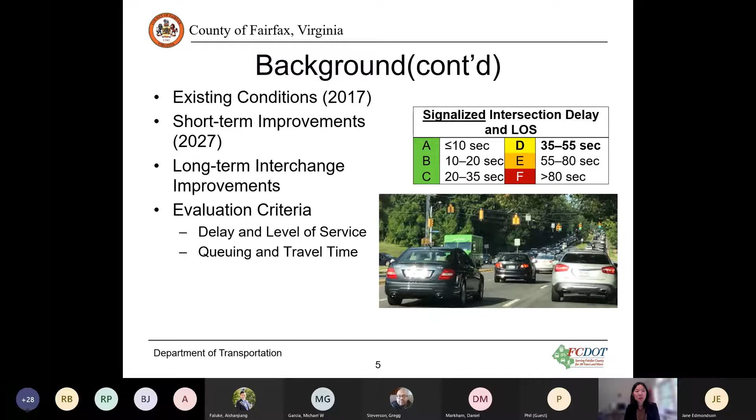We held our first public meeting on June 13, 2019 at the Mclean Community Center. We collected feedback on improvement concepts through an online survey, the website, and email.

The survey includes 3 questions. First, which of the intersection improvement concepts would you generally favor for future implementation. Second, which one would you be generally opposed to having moved forward for future implementation. Third, between short-term solutions and interchange solutions, which path forward are you most supportive of? We received 138 unique responses, including 98 survey responses and email feedback.

Concept 1 is to provide 3 continuous lanes on eastbound Dolley Madison. The benefit is an additional eastbound through lane at the Dulles Toll Road interchange to address capacity limitation.

Concept 2 is the continuation of concept 1, providing 3 continuous lanes on eastbound Dolly Madison through the intersection at Lewinsville, Great Falls Street. The benefit is an additional eastbound through lane all the way through the intersection. This concept only makes sense if concept 1 is also implemented. The benefit of concepts 1 and 2 is that a third travel lane provides additional capacity to move vehicles through the intersection and improve overall intersection operations.

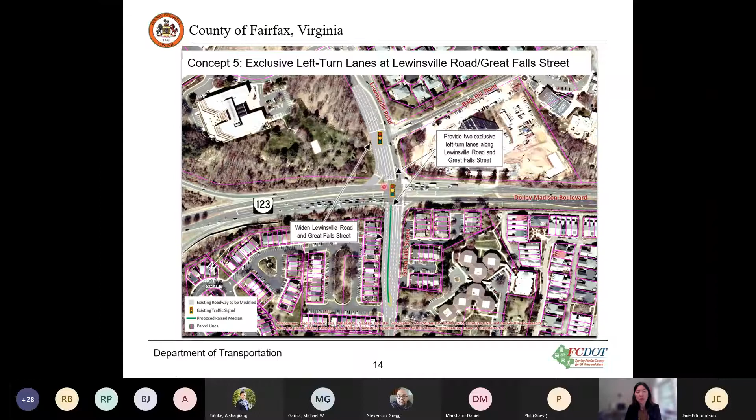Concept 5 generally received strong support, 48% supporting and only 27% opposing. Some positive feedback includes that this will remove the split phase, allowing more efficient signal timing, and add longer left turn lanes on Great Falls Street to increase stacking capacity. The concern is the need to provide access for the adjacent apartments.

Concept 6 is to provide 3 westbound travel lanes on Dolly Madison from Old Dominion Drive to Lewinsville Road. The benefit is an additional through lane for this entire stretch on westbound, which will significantly reduce queues and delays. The drawback is this will impact access for a number of locations on this segment.

Concept 6 received fairly strong opposition via the survey, 34% opposed, but much stronger opposition via email and website feedback. The major concern is access for Evans Farm, Mayflower, Balls Hill Estates, etc. The community is worried about losing full movement, especially left-in left-out access to Dolly Madison, requiring them to make U-turns at congested intersections or to access other roadways.

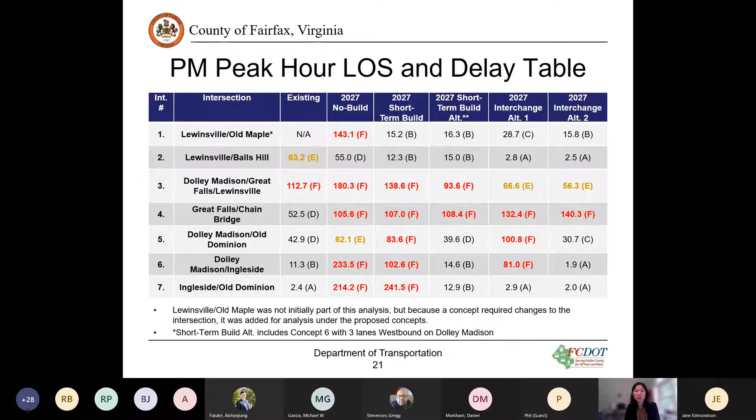That's where I ended at the last public meeting, plus community feedback. In the next section, we'll talk about new information that has been developed since that meeting.

Throughout the process, even as the team provided improvements to adjacent intersections, the intersection of Great Falls and Chain Bridge Road continued to fail during the PM peak. In the previous tables, this intersection continued to show significant delay. At the last meeting, we promised the community we would take another look.

Next, restripe the existing northbound approach to eliminate the left turn lane and provide two exclusive through lanes and one exclusive right turn lane, so rerouting traffic can use either McGarrity Road or Dolly Madison Road. With these configuration-based changes, it will help reduce the overall intersection delay significantly.

For the study corridor, one major traffic challenge is westbound Dolly Madison during the PM peak hour. The westbound approach at the intersection of Lewinsville, Great Falls Street experiences significant delays and heavy queues. Those queues create spillback that can extend to the upstream intersection at Dolly Madison and Old Dominion Drive. Since we decided not to pursue concept 6 based on community feedback, two additional concepts were developed to mitigate these operational issues.

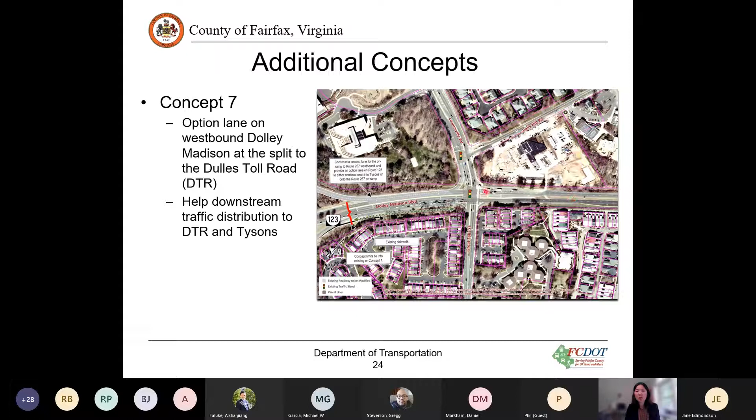Concept 7 includes an option lane on westbound Dolly Madison at the split to the Dulles Toll Road. This concept helps downstream traffic distribution onto the Dulles Toll Road and into Tysons. The intended outcome is to balance lane utilization along the westbound approach and increase throughput through the intersection.

The second is the staff preferred scenario. This one includes a few more additional improvements, the first of which is concept 3.

We decided to bring it back because the close signal spacing of Balls Hill Road to Dolly Madison Boulevard is not ideal, particularly during the PM peak. Although public feedback did not demonstrate support for the left turn restriction, reintroducing it will help simplify the Balls Hill Lewinsville intersection conflicts and the spacing issue with Dolly Madison and Lewinsville.

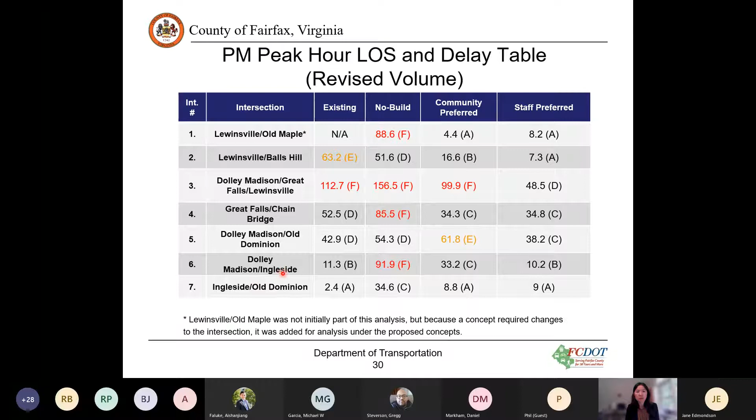The other intersection that shows a significant delay reduction is Dolly Madison at Ingleside Avenue. The next few slides will provide comparisons of queuing results in different scenarios.

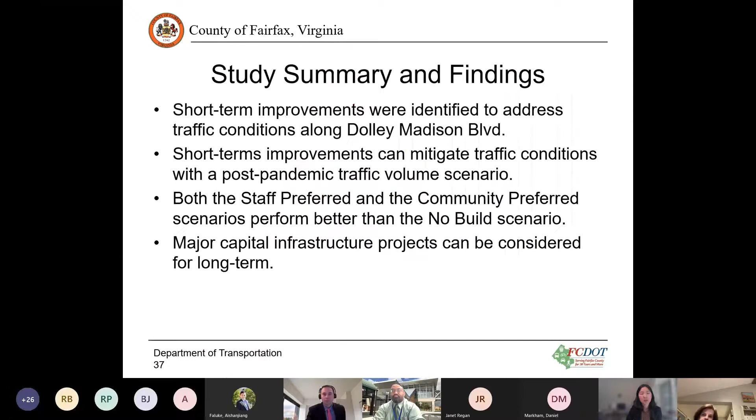last slide that talks about priority. So we need to prioritize the short-term improvement concepts, because there are so many of them, and we definitely do not have funding to do all of them. We would like to do a high-level screening process on all of those improvements using factors including feedback from the community, coordination with the supervisor's office, traffic operations, right-of-way impacts, cost, safety, and constructability. We have a lot of factors we can use to do a high-level screening on those improvements to see whether they should move forward.

So that will be the next step. I don't know whether Greg, you want to chime in here to see how we're gonna recommend some of those improvements. Here's what I would just generally suggest - if you go back to the X's and check slide, this will help me a little bit. Sure.

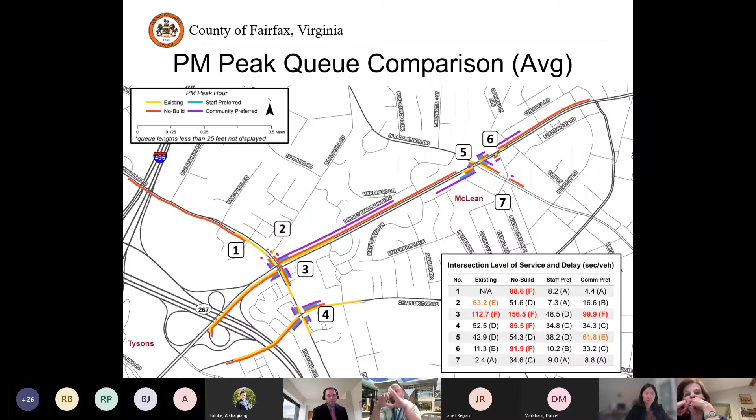While we're doing that, there are some improvements that we suggest that weren't necessarily suggested or supported by the community. There's some that we substituted in because we took one out that we knew the community didn't want. While I think during this comment period we'll accept any comment, whatever people want to provide.

I personally would like to know, from the perspective of concept 4 or 4B, regardless of our thoughts on our preference and what we think the intersection needs, is the community just - whether it's the standard jug handle, modified jug handle, jug handle light, whatever - if there's just no jug handle, end of story? I'd like to know that, regardless of the modified version we've provided, because that was kind of a difference between what we think makes sense operationally and what the community had kind of voted on. So that's first and foremost.

Similarly for the restricted left from Balls Hill - I think those two things, and then the new things we've brought forward in terms of the option lane for the toll road and the slight extension of the westbound lane, because they're new, is that something people have heartburn over? Do they think it's helpful, do they think it's useless? To get a general idea of the areas where we got an X versus a check, where we might want to land. And if there are some other thoughts or things people want to put forward, I'm all for hearing that as well.

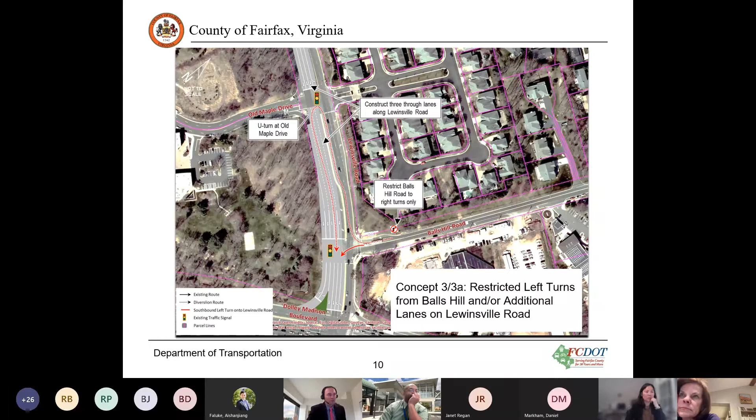Okay. The next one is kind of a comment, but you can see if it's worth an answer. There is a frequent challenge on Lewinsville from the Windy Hill intersection extending west for eastbound traffic, which backs up even across the Beltway. There are times that this actually makes it nearly impossible to turn left out of Scotts Run and Timberly. So I think we're getting a little further outside the study area. Yeah, because this is near the Beltway, right? He was referring to that. Yep. So further to the west. It's good to know, but I think it's starting to get outside of the particular area in which it's being evaluated.

I know there's another intersection improvement project also on Lewinsville Road. Maybe with that one and what we're doing here can help with the traffic flow on Lewinsville Road. Yeah, if nothing else, the concept of trying to structure intersection 3 there in a way that allows stuff coming down Lewinsville, along with the potential additional capacity we're trying to provide there. If that can clear out the queues, then at least this intersection will not be the cause of a backup that might get to the Beltway.

If there's a different intersection further back that's outside of the area, or the one just west of Old Maple, that's not a part of this. But if it's this intersection causing it, part of what we're trying to do is help from a capacity perspective to potentially minimize that queue coming eastbound on Lewinsville.

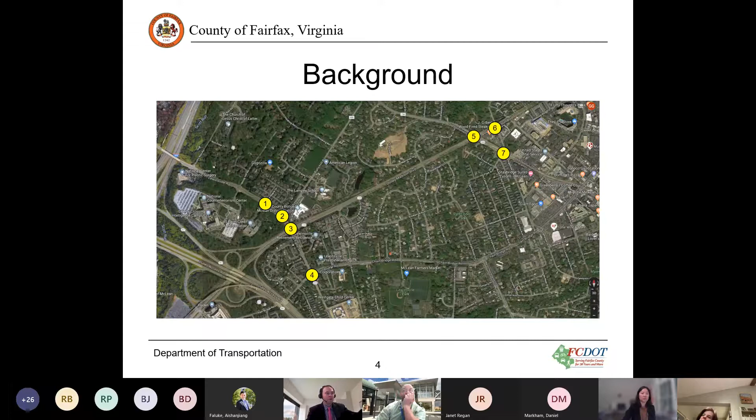As part of that, they said for the jug handle - this is a different comment coming in - are you aware that McDonald's drive-through backs up onto Ingleside regularly? So that's just more information to help answer that other question.

Yeah, and that whole triangle is a challenge. It's just honest, it's a challenge. One of the things we talked about is if we're going to do this jug handle, how does the McDonald's - I don't know if there's anybody here from McDonald's - but the parking for the restaurant that's on that roadway is also something we'd have to think about, because you're right, you don't want to send more traffic onto a roadway that's going to create more problems.

So from the perspective of stacking from the McDonald's or the parking that's there, potentially trying to figure out if there's a way to do something with the parking to allow the stacking to not be where vehicles are traveling, or some other way to tackle that stacking so it doesn't hinder what we're trying to do. That was definitely something - I've been out there and seen, especially at certain points of the day, when you're at a McDonald's that's not close to other fast food, you get that rush. Trying to figure out how to work through that is going to be important for sure.

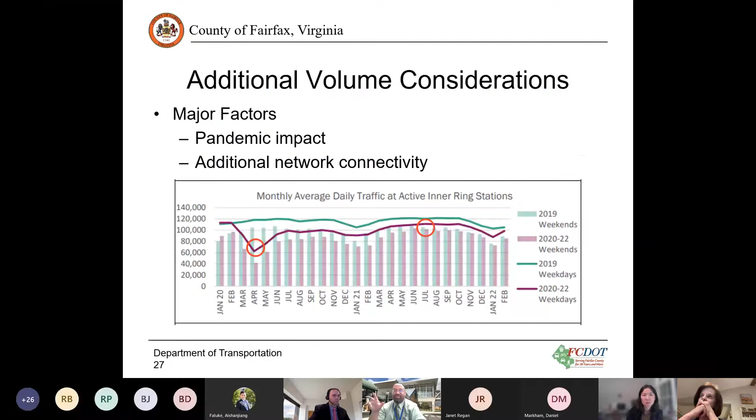So for that one, when we did our traffic growth, we had what was called background traffic growth, which for this new analysis dealing with the pandemic we discounted, but we also included the developments we knew were coming in at the time we were doing the study. I believe - I don't remember what the name of the 1800 Chain Bridge one is - but we had three different developments that we included as far as traffic growth, because they were basically the developments we knew were going to be there.

Is it Scotts Run? Yeah, it could be Scotts Run. There was Heritage and Scotts Run and Capital One, I think there was one other thing. We included all of those because we knew they were coming - there were traffic studies from the entitlement cases that we used to develop the traffic volumes, since we knew they were coming and would happen within the time frame we were doing this analysis.

So they're in there - Scotts Run South, that's the one. I think there was another residential one - Capital One, because at the time Capital One wasn't even open. And then I think there was one last one, four total. It's the Highlands. Highland, thank you - I said Heritage, I think, I knew it started with an H, I got the wrong name. Sorry, okay, let's see here.

Next question: would there be value to a signal at Dolley Madison and Ingleside without doing the jug handle?

Yes and no, I guess is the best way of answering that. For what we are specifically doing, from the traffic operations perspective, probably not as much. From a pedestrian crossing perspective, yeah. So depending on the thought process, I think there could be some benefit to it, but for what we're specifically doing, potentially not.

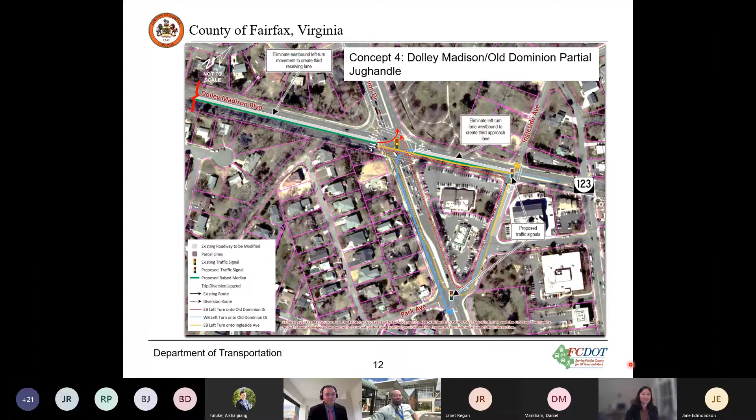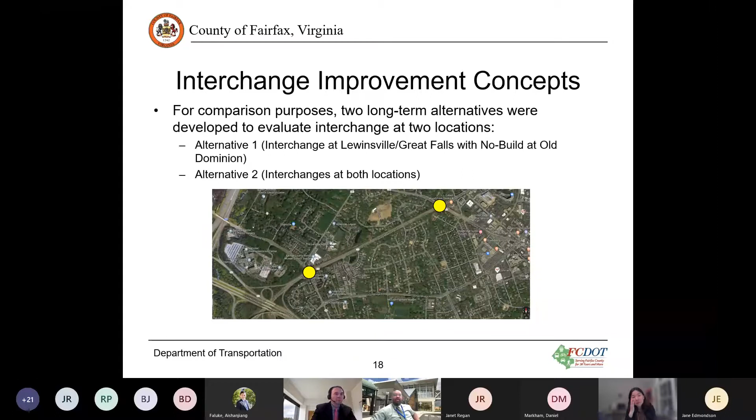There's a question: has there been any consideration of undergrounding Dolley Madison at the Great Falls Lewinsville intersection? Yeah, that was part of what we talked about, the potential interchange concept. It didn't really seem to be a lot of support for doing an interchange here per se, but if grade separated was the option, that would probably be one of the potential solutions. Either Dolley Madison going under, or Great Falls Lewinsville going under, or one of them going over. That would be the concept for grade separation if we were going that way.

So the community feedback is mixed towards that. Some folks do think that if you need to invest, you should invest in the proper infrastructure, but obviously interchanges are much more impactful. Based on our traffic analysis, we feel that with those short-term improvements, it will make traffic work. So we're trying to avoid those larger scale infrastructure at this point. But community feedback definitely was mixed.

There's a theme I want to let you all comment on, and then there's an actual different question that came in. One is, what kind of outreach coordination has been done with this particular study with the community and the nearby businesses? I think that's kind of a theme that has popped up, and they wanted to know what that might be.

For the most part, we did our 2019 meeting. During this meeting, we had our survey. We're also looking in terms of feedback with respect to this. I also think, from an operational perspective, if there are things to move forward as we get into the feasibility aspects, especially if we start getting into potential right-of-way impacts, not only on private property, but even on some of the areas on the north side of Great Falls, or if we start talking about some of the signal stuff, we'd probably have to go and do some specific conversations with the folks who are in the area. If we start doing anything with respect to the jug handle related to Ingleside, or related to the restaurant or the McDonald's that are out there, we'd obviously have to have a conversation about that.

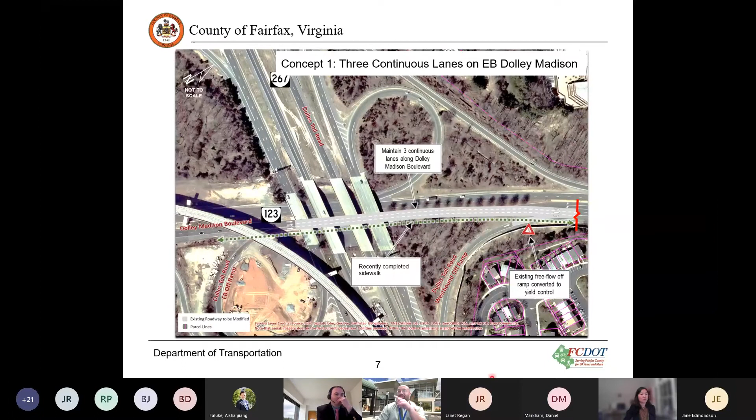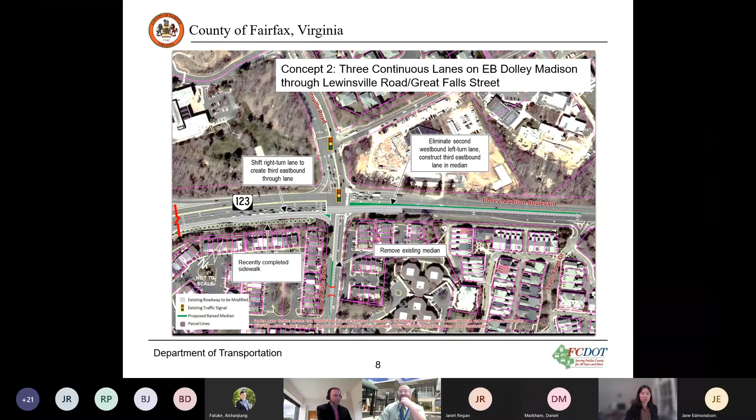So there's kind of, and we may have to go back to the slides. The concepts 1 and 2 are east or west of Great Falls, Lewinsville, coming into the intersection. Okay, yeah, so that's the eastbound one. And then the other one is the one that we were talking about, which is westbound. Go to concept, what is it, 8 or 7, I think it is. You mean the new concept? Yeah, go to the new concept, because I want to show them the other one that we're talking about. Okay, yeah, that's the new one instead of concept 6. So now we have this one.

Yeah, so it's just a small kind of capacity queuing based attempt to provide some additional storage between Evans Farm and the intersection. But there would be, maybe I'm still confused, were you talking about a third lane being added in the westward direction from Old Dominion up Dolley Madison all the way through? Is that correct? That's concept 6.

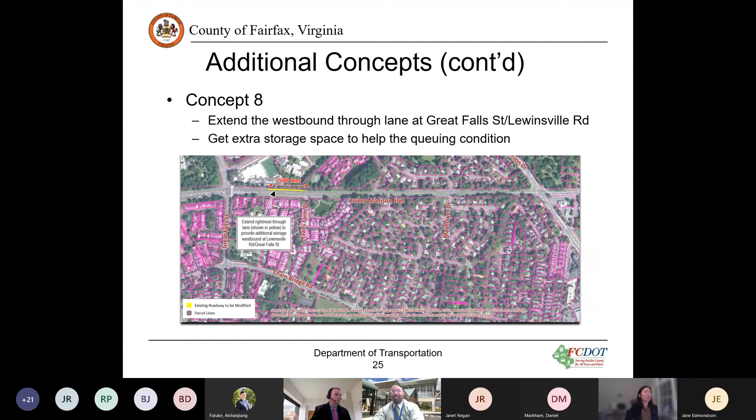Yeah, that was the one that we decided not to do, that was concept 6. Yeah, that one was eliminated. Are you talking about a third lane being added going east from Lewinsville to Old Dominion? No, just basically leading up to Lewinsville and then a short stretch up to Evans Farm so people can get back into the 2 lanes going eastbound. So the stretch behind Evans Farm and Broyhill will be 4 lanes across, basically. Yep, that'll stay.

Thank you for that clarification, and thank you for your openness. This meeting's been very helpful to me. I appreciate that. Thank you. Thanks, I appreciate you. Thank you.